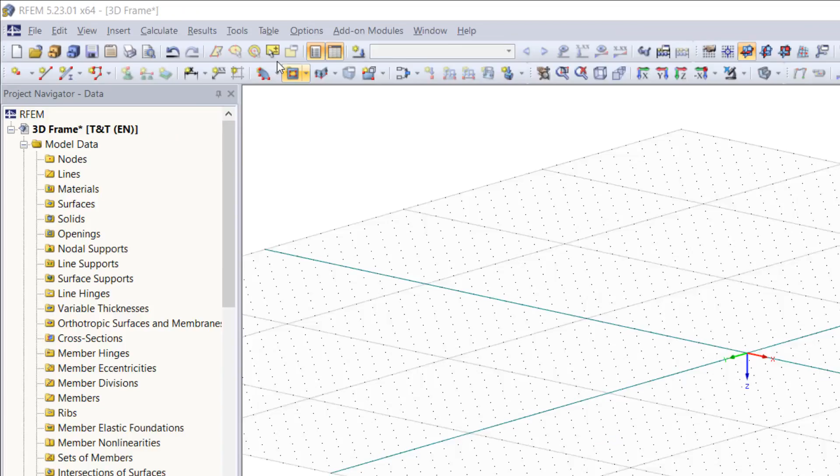In this clip, we are starting with the first tip, using model generators during your modeling process. To access the dialog we can find in the menu Tools, Generate Model Members or Surfaces, and as you can see we have a lot of options for several structure generators, starting here from basic 2D models like 2D frames or 2D trusses to more complex 3D models like 3D frames and also trusses.

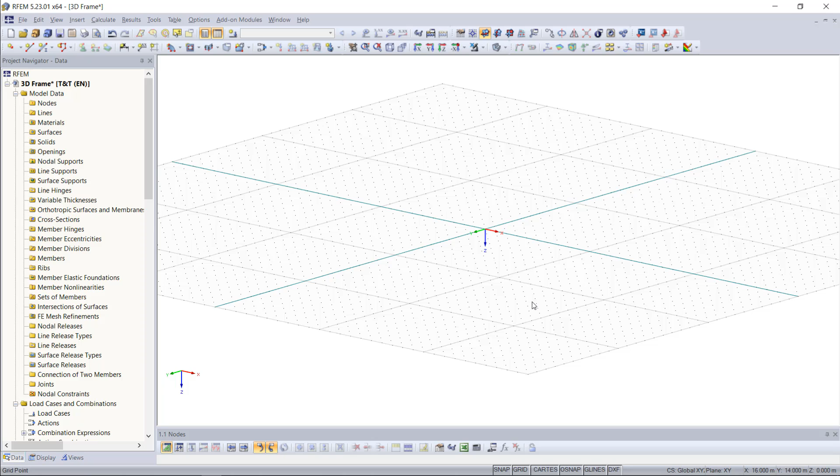We can even find stairs and also complementary elements like bracing and cells for stiffening a structure. As an example, we are going to create a 3D frame with bracings only using the model generator. And once again, go up to the menu Tools and choose Generate Model Members 3D Frame. Then, as you can see, a new dialog box appears.

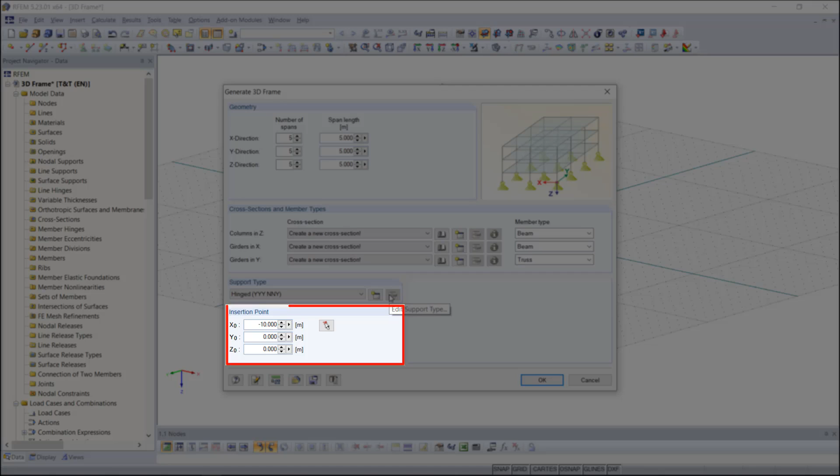And here we have to enter all parameters like the geometric information for our frame, cross-section and member type, support type, and we can also choose the coordinates where our structure should be inserted. And we are starting with the geometry. The number of spans, we can set this as 3 in X direction, 2 in Y direction, and 1 in Z direction. For our span lengths, we choose 5 in X direction, for the Y direction 4, and maybe 3 for the Z direction.

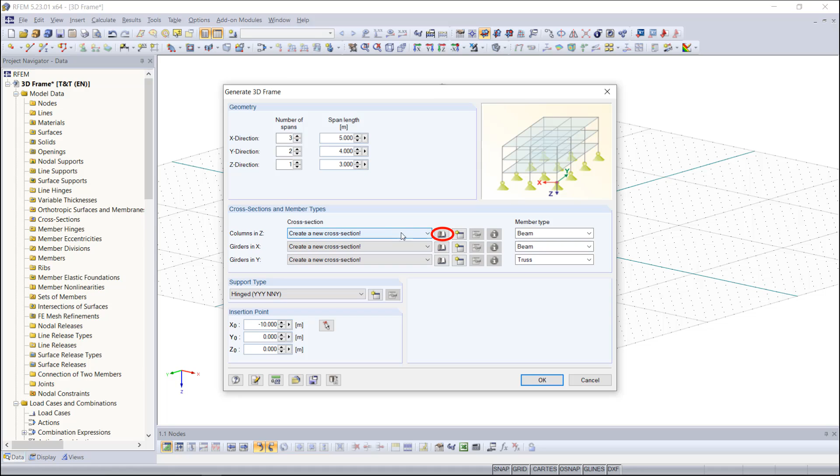Moving on to the cross-section and member types, the program is telling us here that we need to create a new cross-section. We will start with the columns, so for this, open up the cross-section library. And you can see here that we have many different cross-section types. So for the columns, we will begin with the rolled sections, and in particular the IPE 300.

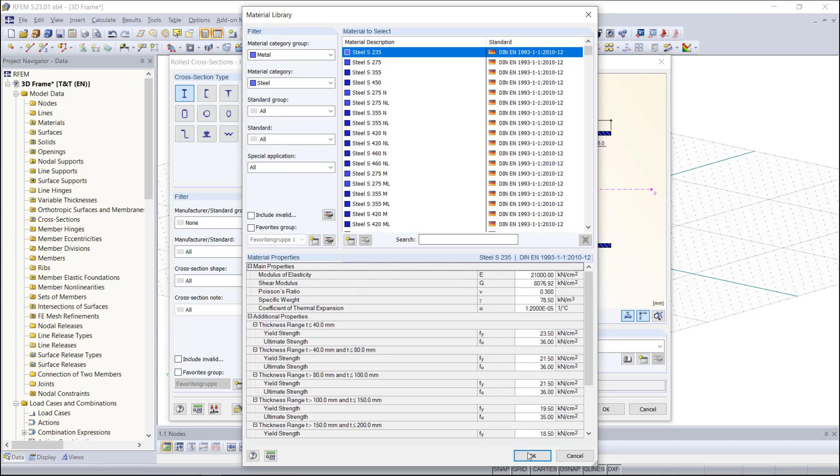Regarding material, we can import it from the material library, and we will choose steel, for instance, S235 based on the European standard. Then we click OK. And we click OK once again. Now, as you can see, the same cross sections are set for all of the members, but for the other members, I actually want different cross section types.

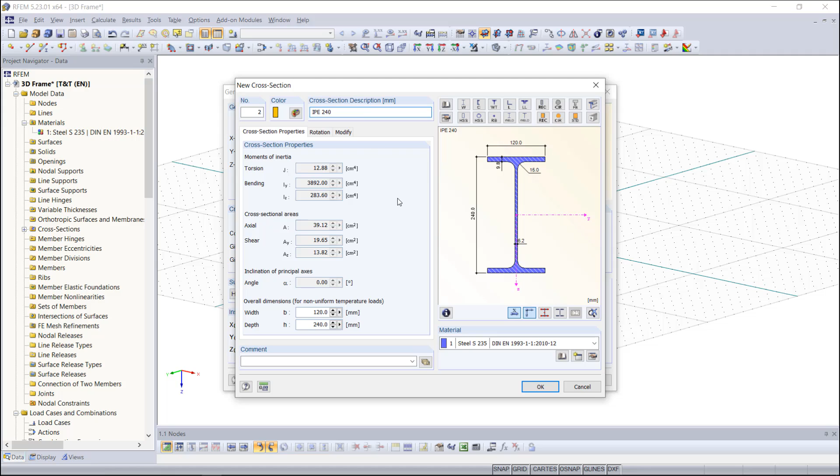So for this, if you already know which kind of cross section you want to have, it's quicker to click on the Create a New Cross Section symbol and simply enter the name of the cross section. As you can see, RFEM automatically imports the properties out of the library. We enter OK to finish our selection. Same procedure once again for the members in Y direction. Enter the name of the cross section and click OK.

Under member type, we have several options using the drop-down menu like the basic beam members, but for our frame, also a truss member, which you can see the program automatically inputs here. A truss is going to set a moment release, so we are only transferring axial and shear forces.

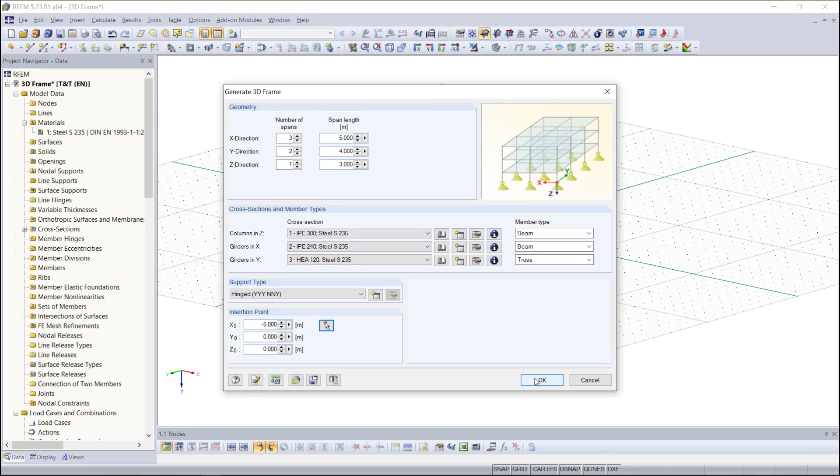As the next step, we can also change our support types for the structure by the drop-down menu or creating a new support type. But for our frame, we just leave the hinge supports. In addition, we can specify where the structure should be inserted, and we choose maybe this point. By entering OK, our frame is simply generated.

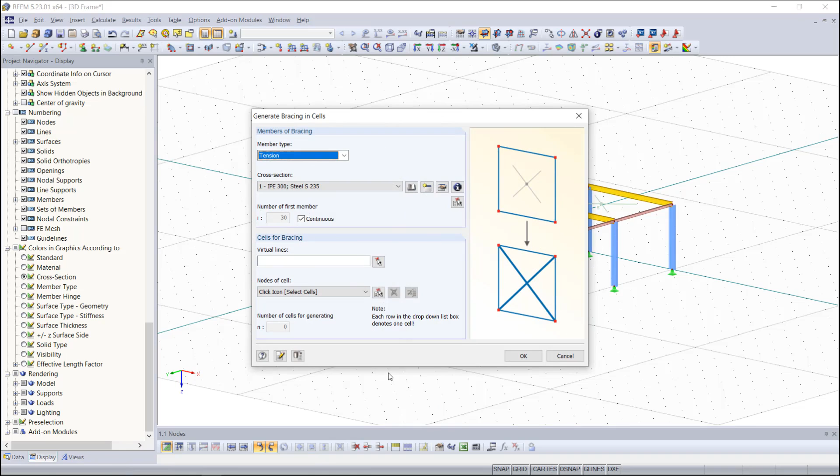So, as I've already mentioned, we can also create bracings. And once again, go up to the menu Tools and then choose Generate Model Members. Down here we can find bracing in cells. Then a new dialog box opens, and as member type we choose tension as it's set on default. Then we select the cross-section type and enter OK.

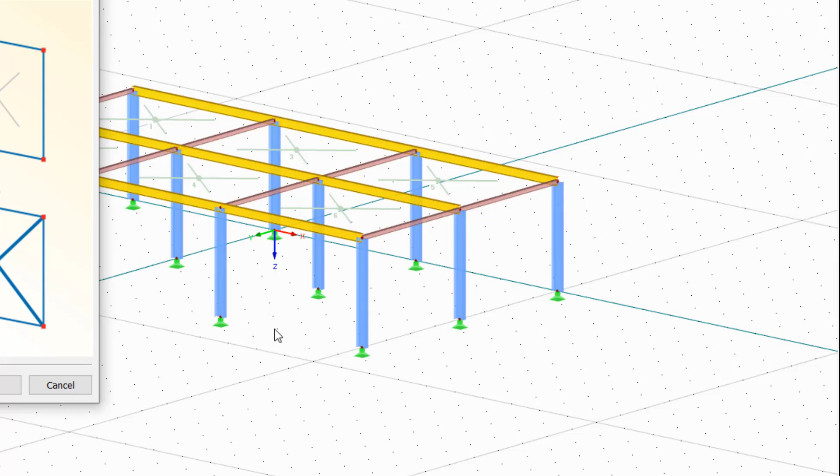As a next step, we can choose those cells where we want to add a bracing. And as you can see, RFEM automatically recognizes closed ones. But for not completely closed ones like this one, we have to create first a virtual line in order to use it as a bracing cell. Once done, we click OK, and then we choose the cells, for example these ones. And then by entering OK, our bracings in the chosen cells are quickly created.